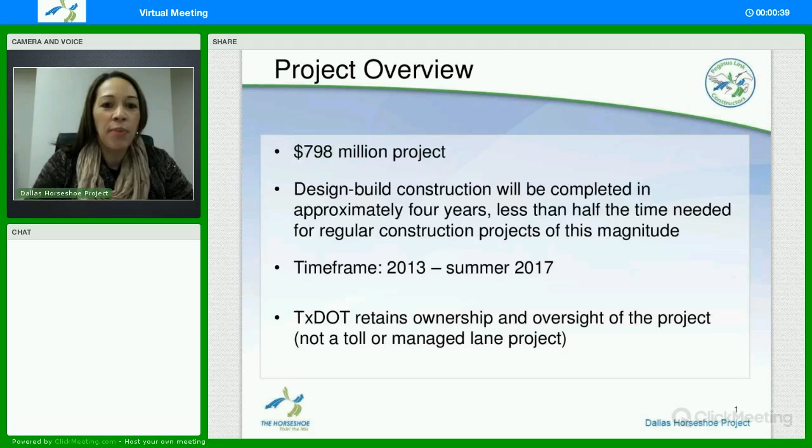My name is Katrina Keys with the TxDOT Dallas Horseshoe project. Our project overview: our project is $798 million. It's a design-build construction project that will be completed in approximately 4 years, less than half the time needed for regular construction projects of this magnitude because of the design build process. The time frame for our project is 2013, so the project started last year, and the project completion date is summer 2017. TxDOT will retain ownership and oversight of the project at completion, and this project is not a toll or managed lane project.

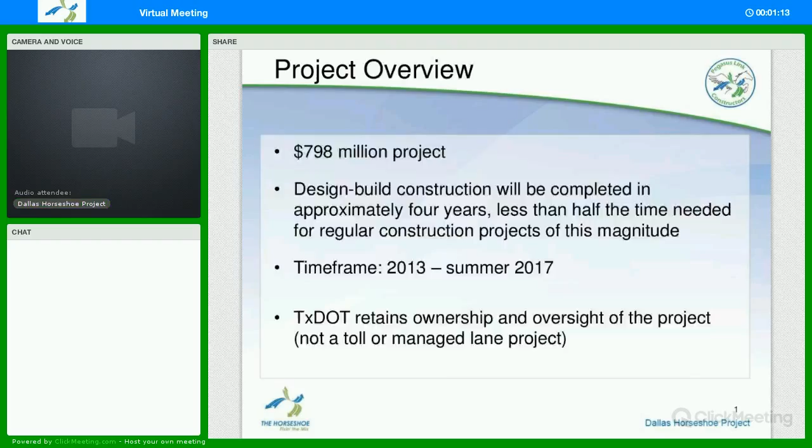Our project team consists of Texas Department of Transportation and Pegasus Link Constructors, our design builder. Pegasus Link Constructors, or PLC, is a partnership between Fluor and Balfour Beatty Infrastructure. This next slide shows our project map, and we're just near downtown Dallas, so on I-30, just west of downtown Dallas and across the Trinity River, then through the Mixmaster in downtown Dallas and going south on I-35E, just north of 8th Street is our project limit.

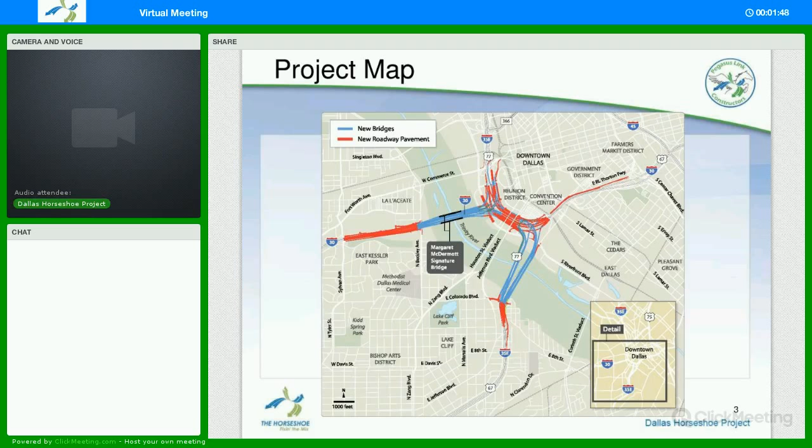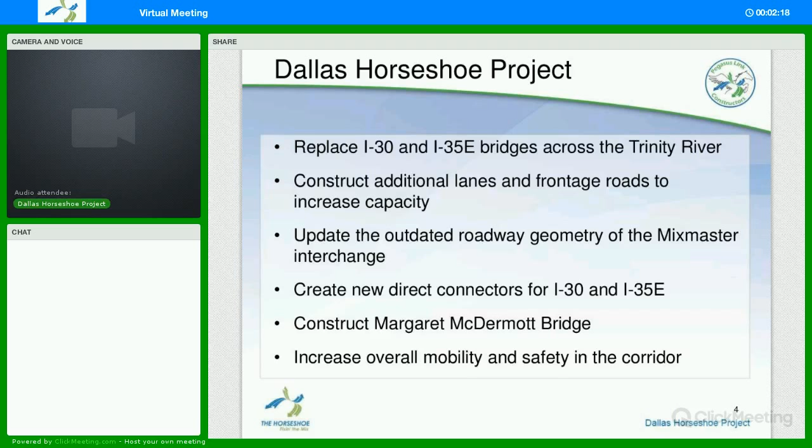For the Dallas Horseshoe project, it will replace I-30 and I-35E bridges across the Trinity River, construct additional lanes and frontage roads to increase capacity, update the outdated roadway geometry of the Mixmaster interchange in downtown Dallas, create new direct connectors for I-30 and I-35E, construct a signature Margaret McDermott bridge, and increase overall mobility and safety in the corridor.

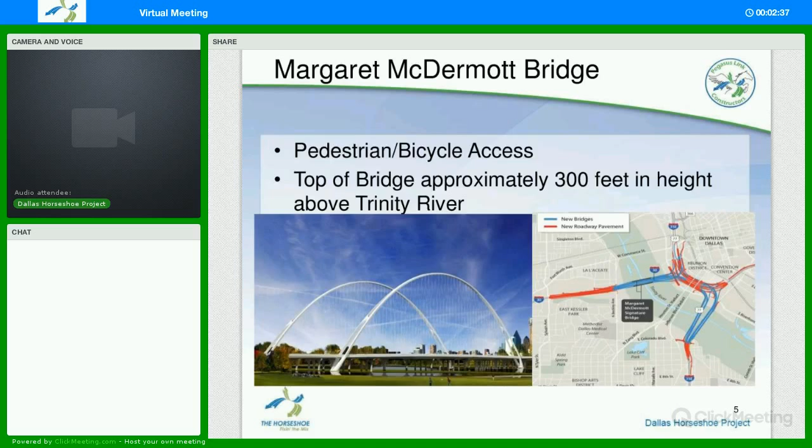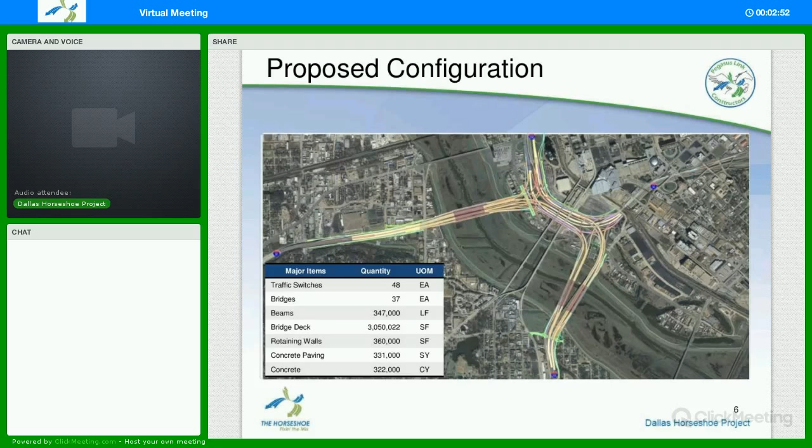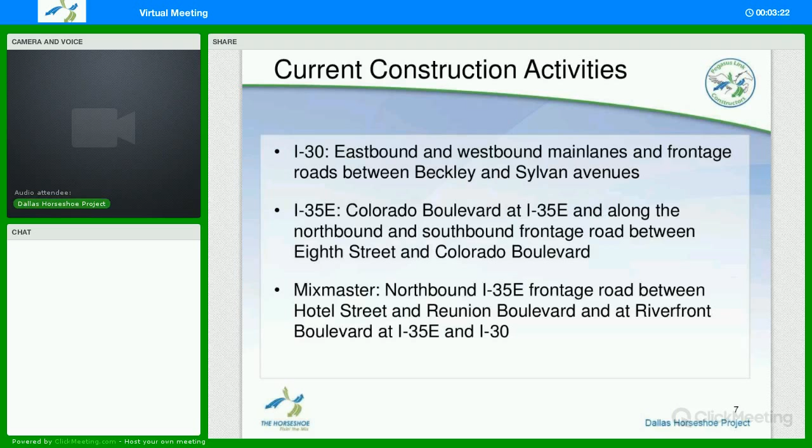Our current construction activities include on I-30 eastbound and westbound main lanes and frontage roads between Beckley and Sylvan Avenues. On I-35E near Colorado, northbound and southbound frontage road construction between 8th Street and Colorado Boulevard. And downtown in the Mixmaster, construction on northbound I-35E frontage roads between Hotel Street and Reunion Boulevard, and at Riverfront Boulevard at I-35E and I-30.

Next, we talk about our project phasing. The phasing part we are currently in for construction is construction work outside of the existing footprint of the roadway. So if you're driving this area, you will see construction along the sides or outside of the roadway, and we are almost complete on this initial construction on the outside of the footprint.

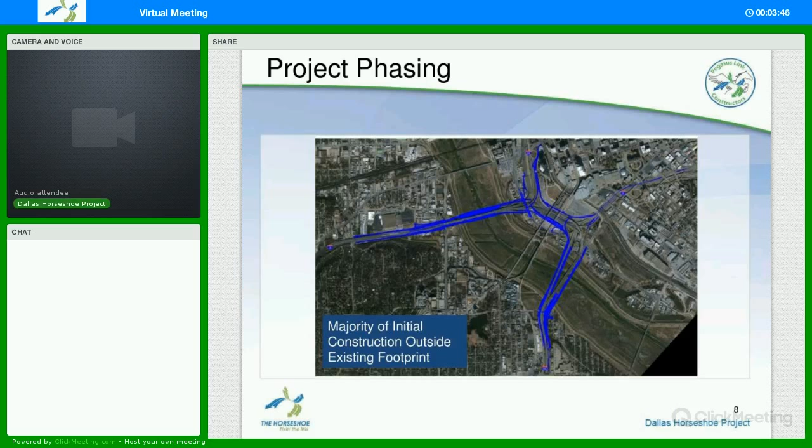Next year in 2015, early 2015, we will have 2 major traffic switches, and these switches will affect the riverfront exits on I-30 and riverfront exits on northbound I-35E.

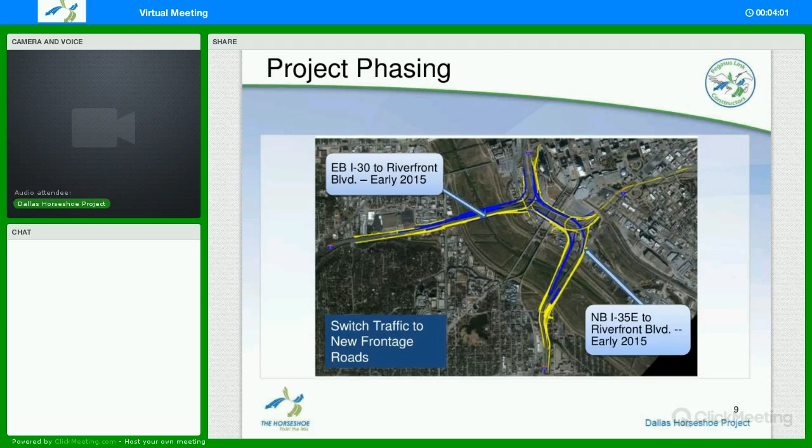The first traffic switch on I-30 that will affect the riverfront exit: the existing riverfront exit will close when this traffic switch happens, and the new permanent exit for Riverfront Boulevard will open, and it will be right after Sylvan Avenue. Drivers will get off at the new Riverfront exit and stay on the frontage roads to continue on to Riverfront Boulevard.

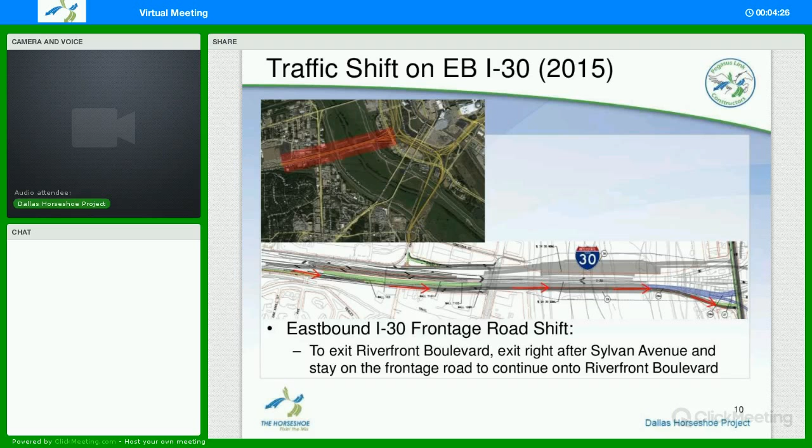The second traffic switch affecting Riverfront will take place on northbound I-35E. The existing exit for Riverfront Boulevard and also the exit for access to eastbound I-30 will close, and drivers will use the new permanent exit for Riverfront Boulevard and access to eastbound I-30. This exit will come about 1.5 miles before where the old exit existed, near 8th Street, and once drivers get off on this new exit, they will take the frontage roads to continue to Riverfront or to continue to eastbound I-30.

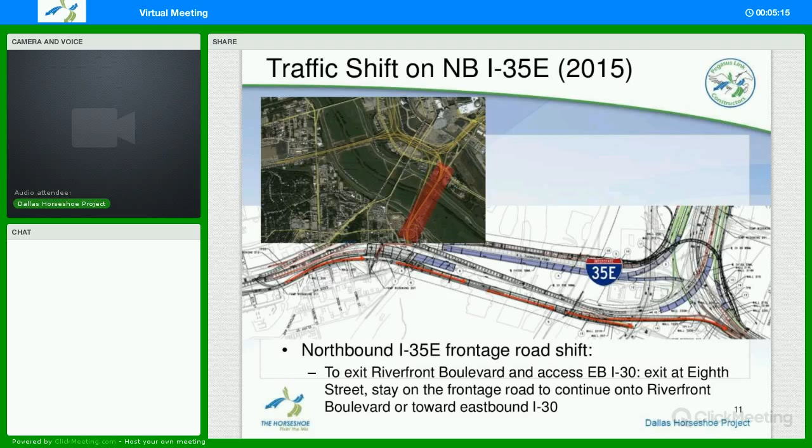For both of these traffic switches, when they take place, we will have signage, and we will send out alerts to our stakeholders list and to the media to help make drivers aware that this change will take place.

Drivers who are driving during this time will have to take a detour. The detour will be to go north on I-35E to Woodall Rogers and go east, then south to 75 through 345, and then drivers can continue east to I-30.

When we do have to conduct these closures, they will probably take place on a Saturday night when traffic is low, usually between 10 p.m. to 5 a.m. There will be at least one Saturday night of this closure, and there could be up to 3 or 4 before 2014 ends.

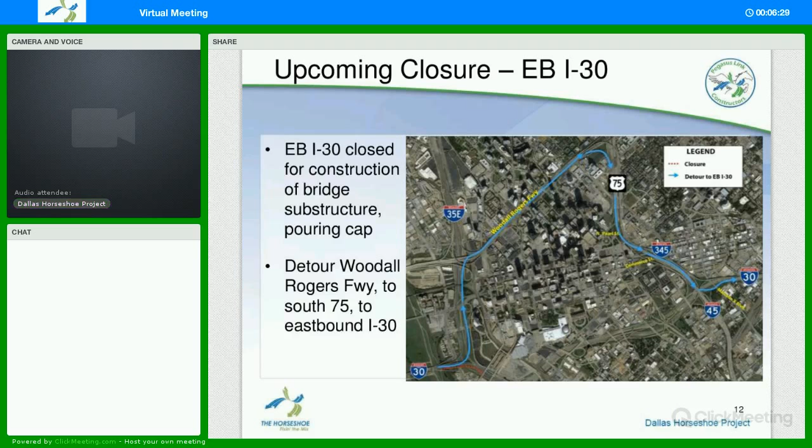When the closures will take place, we will alert our stakeholders and have signage about the closure and detour. The next major upcoming closure we have is northbound I-35E, where the Riverfront Boulevard exit will close.

During this closure and construction, there will be a detour for drivers to continue on I-35E north up to Reunion Boulevard. Reunion Boulevard is a left lane exit, so drivers will have to exit to the left, get off on Reunion, go around to Riverfront, and come down south on Riverfront.

This closure is a long-term closure, meaning it could take up to 90 days. Once the closure takes place, we will send out alerts and information about this closure and detour information.

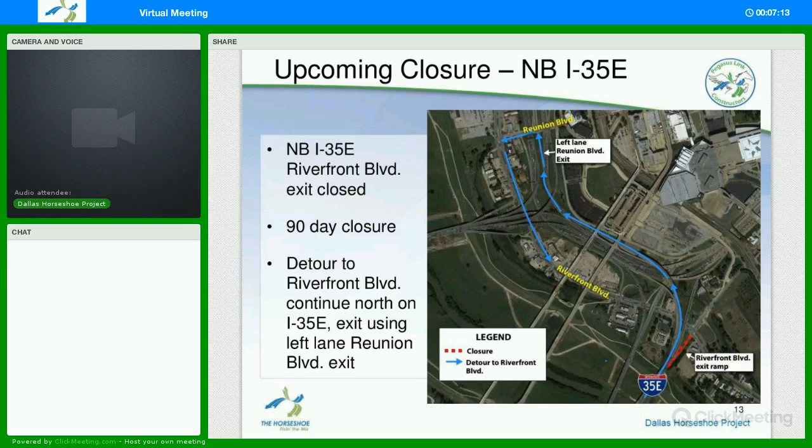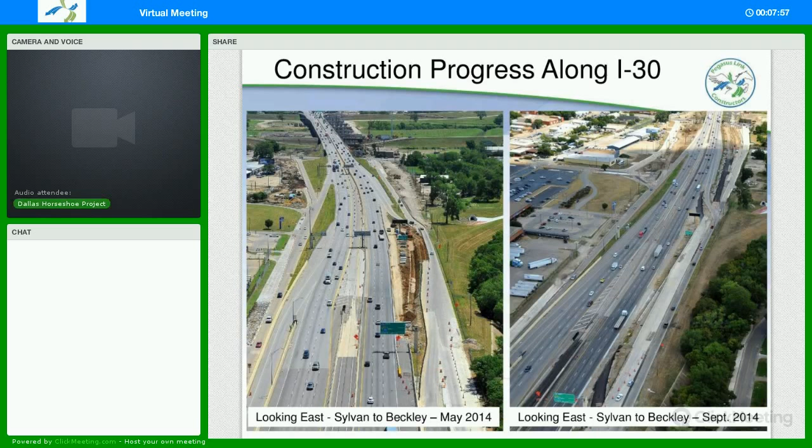This next picture is continued construction work along I-30 looking east in the Sylvan-Beckley area. Here we're doing work on the westbound and southbound frontage roads into Beckley.

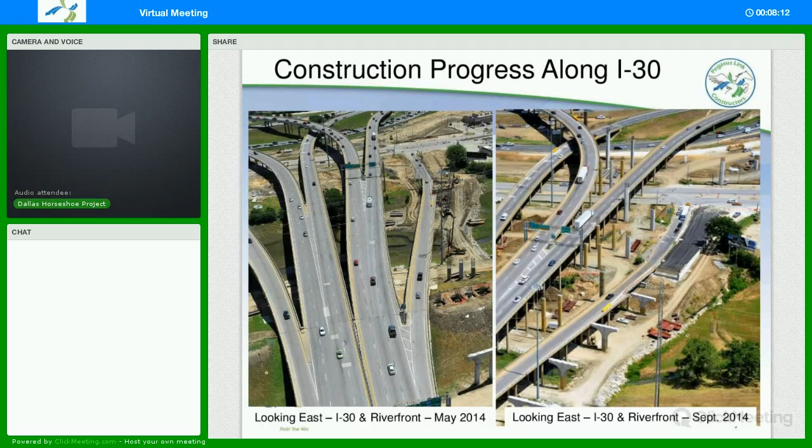This next picture is also construction along I-30, closer to Riverfront, and shows where we have construction working on the Riverfront exit. You can see the progress of this area from May to September.

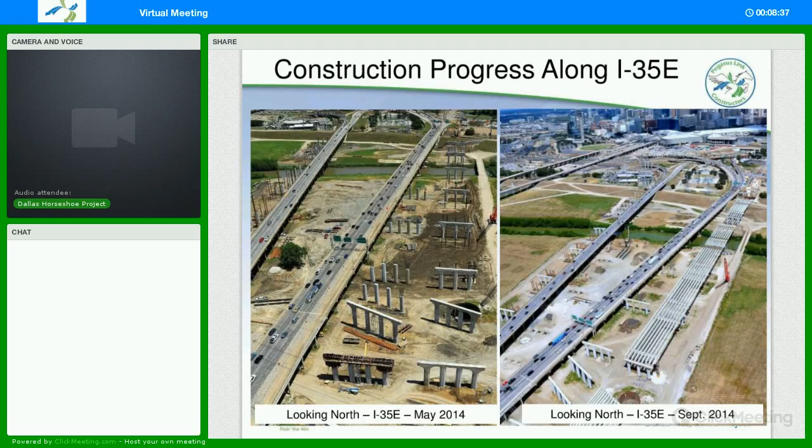Now you want to look at construction along I-35E, and here you can see that we have construction work on the west side, on the southbound main lanes and the northbound main lanes for the frontage roads, and also the superstructure, bridge work, and beam work in this area. You can really see how much progress has been made from last quarter to this quarter.

This slide shows construction along I-35E in the Colorado exit area. Here we're doing a lot of bridge deck work across the Trinity River for that Colorado entrance and exit way.

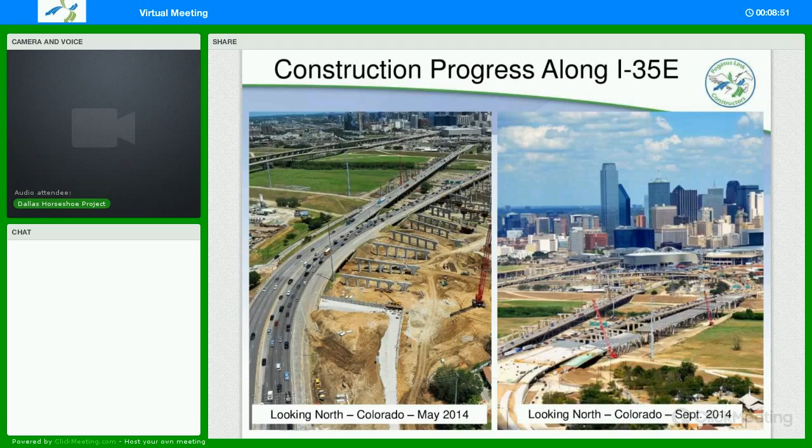Then another picture of construction in the Mixmaster area and continued bridge and roadway construction here. This is a northwest view in the Mixmaster area.

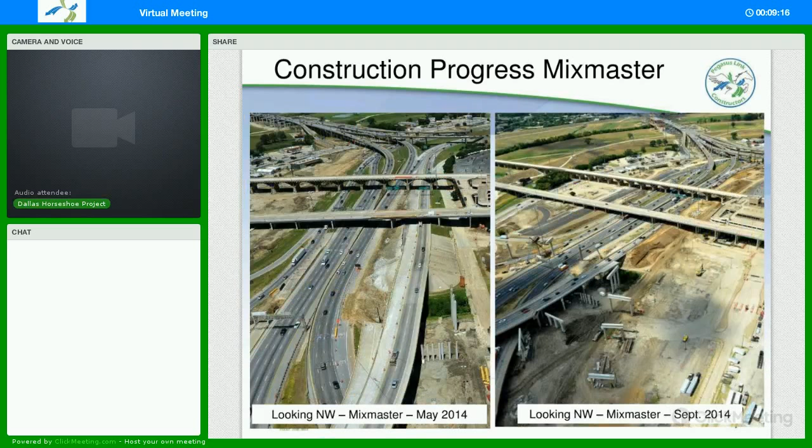Just upcoming construction activities for the next quarter. On I-30, we will continue to have ongoing work along the eastbound and westbound main lanes and frontage roads, and we'll start on the pedestrian and bicycle bridges.

On I-35E, continued ongoing work along northbound and southbound main lanes and frontage roads along Riverfront and Colorado Boulevards. And then in the Mixmaster area, continue with bridge and road construction on I-30 and I-35E main lanes and frontage roads.